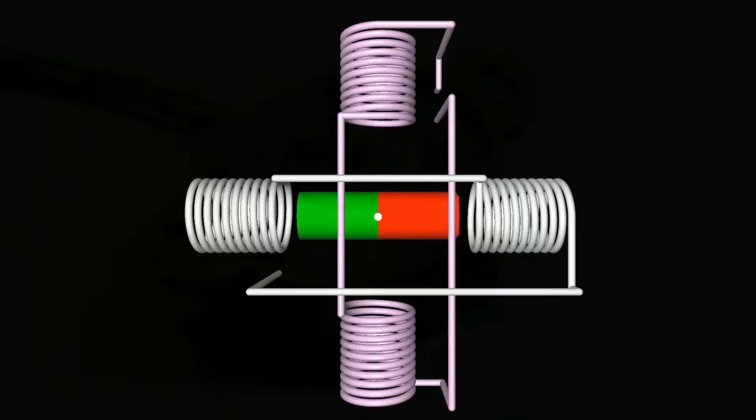The virtual motor shown here operates on the reaction between the bar-shaped permanent magnet forming the rotor and the field created by 4 electromagnets forming the stator. The 2 white marked coils arranged on the horizontal line are switched in series, thus they are organized in one group, called a phase.

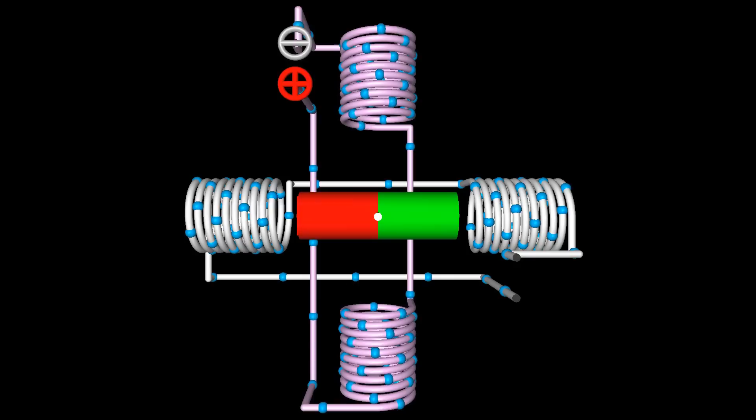Same is true for the 2 magenta colored coils arranged on the vertical line that form the second phase of the motor. The motor has 4 terminals in total, 2 for each phase.

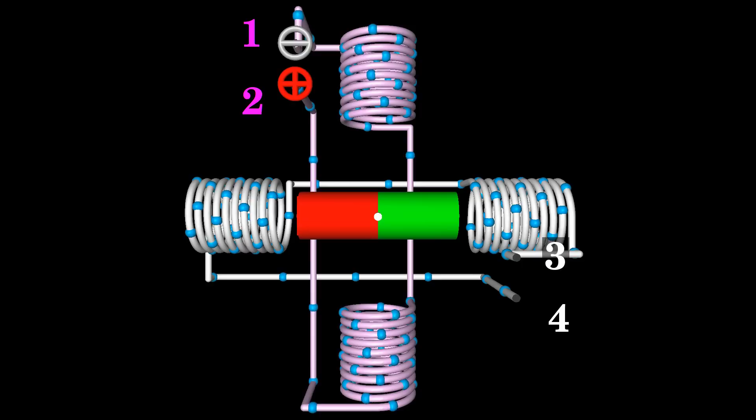As shown in a previous video about brushed DC motors, the electromagnetic field is caused by the movement of charged particles. As soon as the vertically aligned coils are connected to a DC voltage source, the blue painted electrons start flowing through the wire of the coils from the negative to the positive terminal.

Note that the upper end of the wire, which is terminal number 1 of the motor, is connected to the cathode of the voltage source, while the lower end, which is terminal number 2 of the motor, is connected to the anode. If you wrap your left hand around the wire of the solenoid with your fingers in the direction of electron movement, your thumb points towards the magnetic north pole created by the electromagnet. As you can see, the north pole points to the top of your screen.

Due to the field produced by the electromagnets, forces are acting on the horizontally aligned permanent magnet. The north pole of the permanent magnet is pulled to the top right, the south pole to the bottom left. The resulting torque points clockwise. Thus, as soon as released, the permanent magnet starts rotating clockwise.

After some overshooting caused by inertia, the bar magnet comes to rest with a rotational movement of 90 degrees compared to the initial state. The shaft of the motor has moved by 1 step. As long as the magenta colored electromagnets are connected to the voltage source, the permanent magnet will keep that stable position.

To make the rotor spin clockwise by another 90 degrees, the horizontally aligned electromagnets have to be energized with a polarity that creates a magnetic field whose north pole points to the right. As soon as the horizontally aligned coils are connected to the voltage source, the vertically aligned coils are disconnected from the electric power.

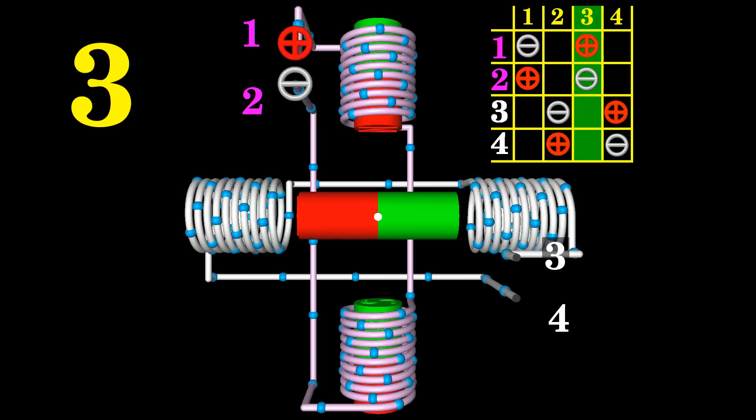From 3 to 2, and so on. Whenever the rotor has completed one step, the rotational direction of the next step depends on the polarity of the voltage applied to the stepper motor's terminals. A step is defined as the angular rotation produced by the output shaft each time the configuration of the voltage at the motor terminals is changed to a nearby column in the table.

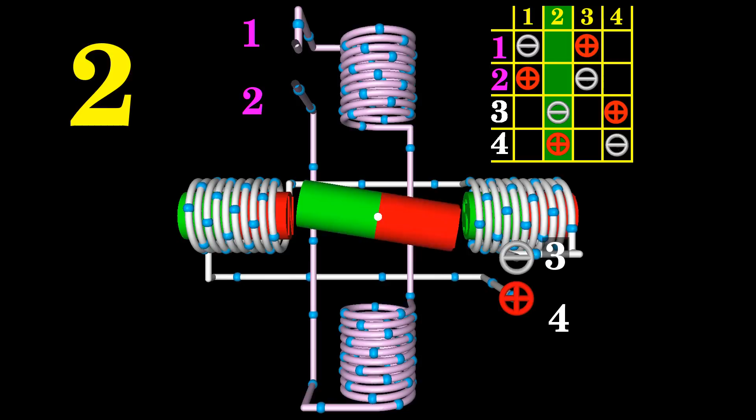The step angle represents the rotation of the output shaft caused by each step, measured in degrees. We get a step angle of 90 degrees for the motor shown here. The position of the motor shaft can be commanded to move and hold at any of those 4 steps without a feedback sensor. The rotational direction between 2 steps can be either clockwise or counterclockwise.

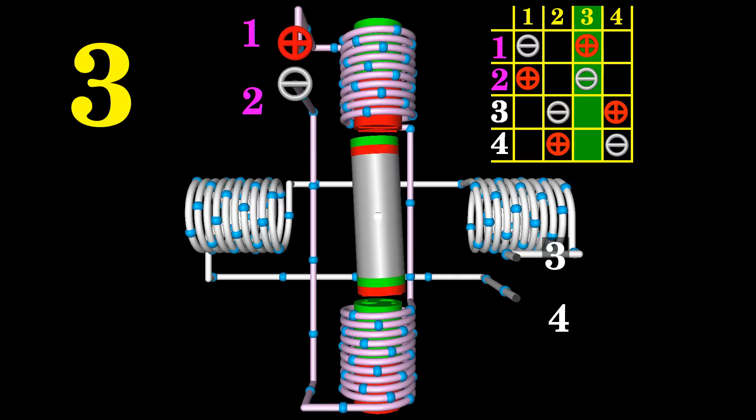The bar-shaped magnet can be replaced by a cylinder made of any solid material with 2 permanent magnets at its ends. The north pole of one magnet and the south pole of the other permanent magnet faces the stator. The motor shaft still rotates by 90 degrees with each step.

To get a higher angular resolution per step and thus a lower step angle, the rotor can be made of 6 permanent magnets. The magnets are arranged on the rotor in such a way that by turns their north respectively south pole points to the stator.

The terminals of the motor are enabled using the sequence listed in the table that was also used to command the previous motor. Note that the motor turns counterclockwise when going from left to right through the columns of the table. With each step, the motor shaft rotates just 30 degrees.

Consequently, after 4 steps, the motor shaft has moved 120 degrees, which is just 1/3 of the rotor movement done by the previous motor having 2 permanent magnets on its rotor. That's because the number of poles on the rotor of this stepper motor is 3 times larger. Go back to column 1 of the table to continue with the counterclockwise movement of the motor.

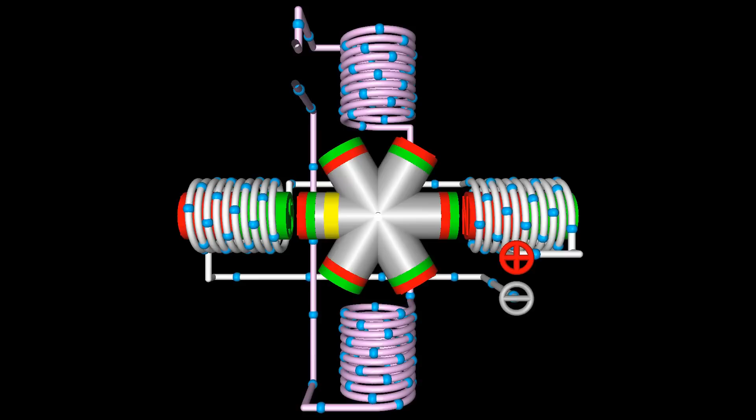A simple way of doubling the angular resolution of this stepper motor without changing the hardware is using half-stepping. Let's start with the horizontal electromagnets being energized. To make this motor spin clockwise by a full step, the vertical electromagnets have to be enabled with terminal number 1 of the motor connected to the anode, while at the same time the horizontal electromagnets are disabled.

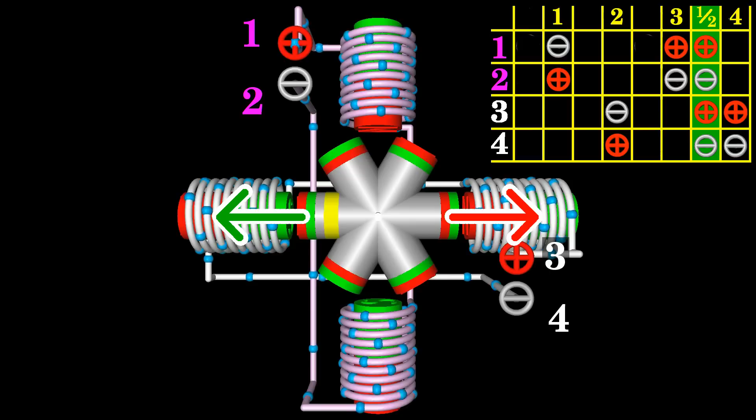In half-step mode, the horizontal electromagnets are not disabled, thus both phases are now on. The torque generated by the white-marked electromagnets is zero, since the forces acting on the nearby permanent magnets point along the horizontal axis. The torque on all other permanent magnets is cancelled out. The magenta-colored coils instead produce a torque pointing clockwise.

As soon as the rotor moves clockwise a couple degrees following the torque of the magenta electromagnets, the white electromagnets cause a torque on the rotor that points counterclockwise. After a rotation of 15 degrees, the torque produced by the white electromagnets counterbalances the torque of the magenta-colored electromagnets. The rotor stops at this stable position as long as both phases are on.

As soon as the horizontal electromagnets are disabled, the torque produced by the vertical electromagnets causes a rotation of another 15 degrees. The full step has been divided into two half steps by turning both phases on before turning off the first phase.

By inserting half steps between all full steps in the command sequence of the table, we get 8 steps for a rotational movement of 120 degrees. The angular resolution is doubled, the step angle halved. Using half-step mode, this motor divides a full rotation into 24 equal steps.

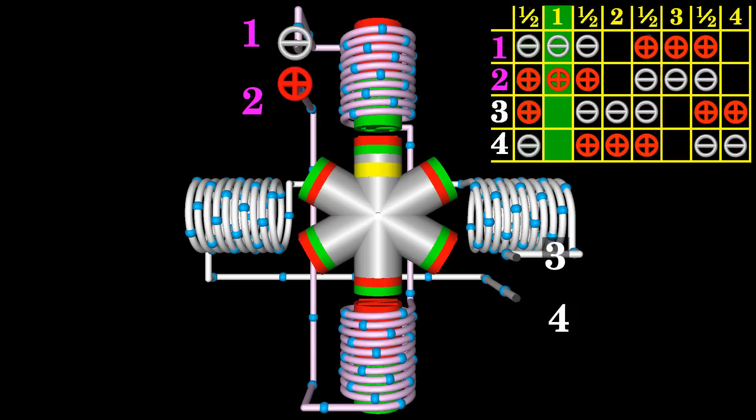Same as before, the rotational direction of the motor shaft changes when going from left to right through the columns of the table. Now the rotor spins counterclockwise. In half-step mode, the drive alternates between two phases on and a single phase on.

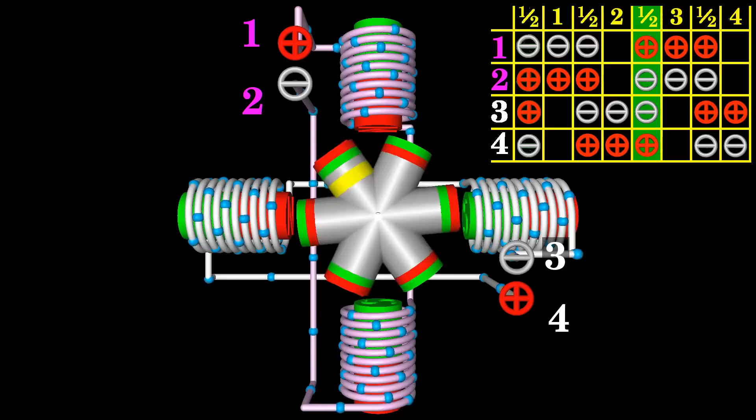When deleting the columns with just one phase on in the table, this stepper motor still rotates clockwise when going from right to left through the command sequence. This operating mode of a stepper motor is called two-phase on full step excitation. In that mode, both phases are always on, and from one step to another, the polarity of one of the phases is changed. The rotational movement is 30 degrees per step, which is equal to the normal full step mode.

The advantage of keeping both phases enabled is the higher torque produced by all 4 electromagnets during motor operation. The disadvantage is the doubled current flowing through the motor compared to the single phase full step mode.

Let's change the winding arrangements of the electromagnetic coils in the two-phase stepper motor. The coil shown here has one winding with a center tap that is connected to the positive terminal of the supply voltage. Whenever the right end of the coil is connected to the negative terminal, a current flows through the right half of the electromagnet. With your left hand you can determine that the magnetic north pole points to the right end of the coil.

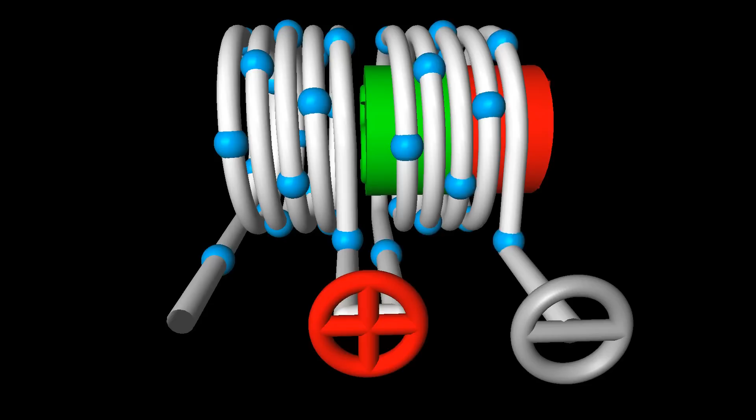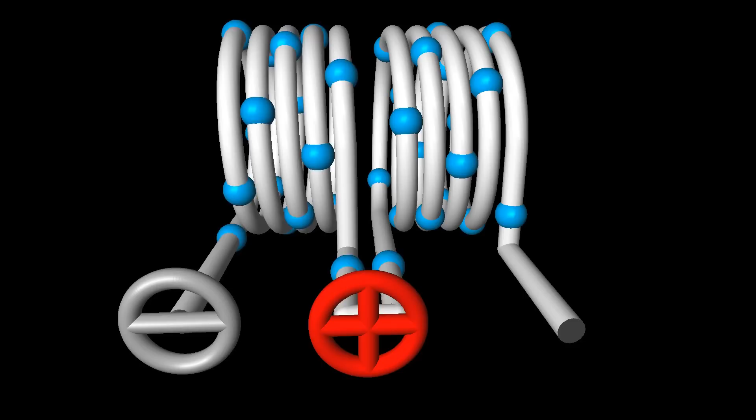If the left end of the wire is connected to the negative terminal, the current only flows through the left half of the coil. At the front side of the coil, the electrons move from top to bottom through the windings, thus the thumb of your left hand will point to the left end of the coil, which is the place of the magnetic north pole. With the center tap, the magnetic pole of the electromagnet can be reversed without swapping the polarity at a pair of terminals.

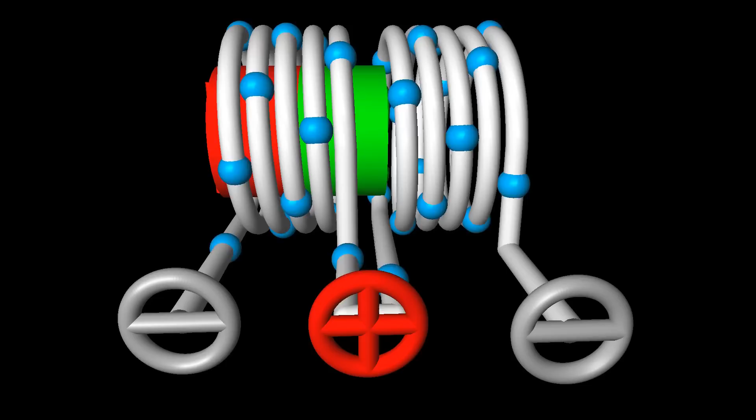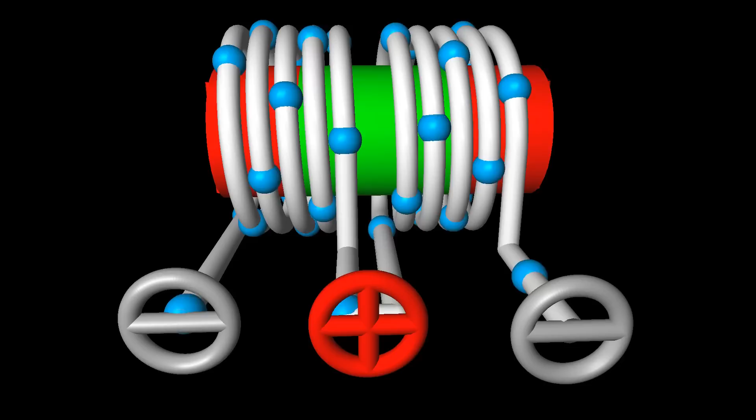Enabling both halves of the coil simultaneously makes no sense. The magnetic south poles are facing each other. The magnetic field is nearly cancelled out, since the electrons run in opposite directions at the front side of the coil.

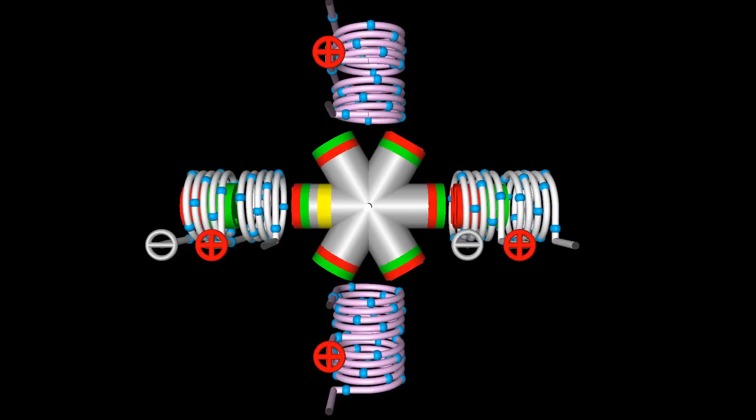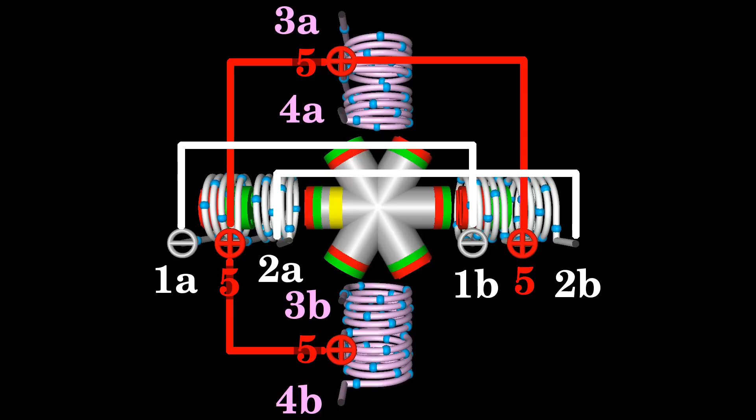In the motor shown here, each winding of the electromagnets has a center tap. All center taps are joined and connected to the positive terminal of the supply voltage. Once more, the white marked electromagnets are grouped to a phase. To achieve this, the wire end at terminal 1A is joined to 1B, as well as 2A to 2B. Same is true for the magenta colored electromagnets. Terminals 3A and 3B, as well as 4A and 4B are also joined. In total, we get 5 terminals coming out of the motor.

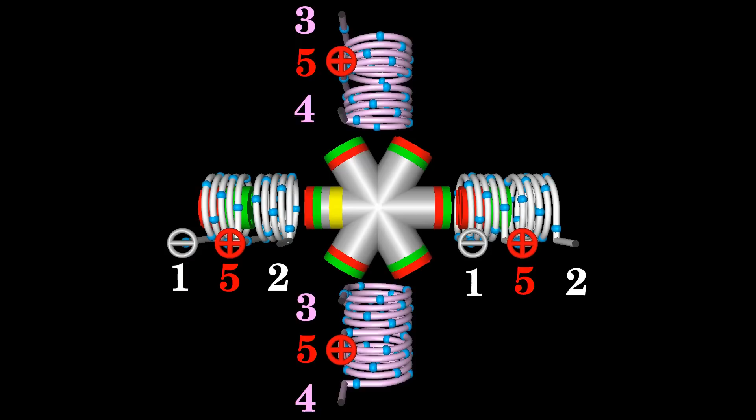Let's command that motor to process clockwise rotation. To process step number 1, the horizontally arranged electromagnets have to be disabled. The magnetic north of the vertical electromagnets must point to the bottom of the screen, thus terminal 4 has to be connected to the cathode of the supply voltage.

Disabling the vertical electromagnet and connecting terminal 2 of the motor to the cathode is needed to process step number 2. To swap the magnetic polarity of the vertical electromagnet compared to step number 1, terminal 3 has to be connected to the cathode of the supply voltage. Terminal 2 is disconnected from the power supply to reach step number 3. Finally, terminal 1 is connected to the cathode and terminal 3 is disconnected from the power source to process step number 4. The enabling sequence is 4, 2, 3, 1, with terminal 5, the center taps, being always connected to the anode of the voltage source.

One end of each winding is connected to the cathode once in every 4 steps of the motor shaft. The rotational movement is commanded without swapping the polarity at one of the terminals, which is why this motor is called unipolar stepper motor. This motor can also be commanded in half-step mode. Even in this mode, no more than 50% of the windings are energized at the same time during operation.

Another type of unipolar stepper motors is the variable reluctance stepper motor. The motor shown here is made of 3 pairs of electromagnets, thus 6 electromagnets in total are arranged on the stator with an angle of 60 degrees between 2 coils. The left ends of the 3 phases are connected to the anode of the voltage source. The right ends of the coil wires are connected temporarily to the cathode to make the motor turn. The rotor is made of a soft iron bar.

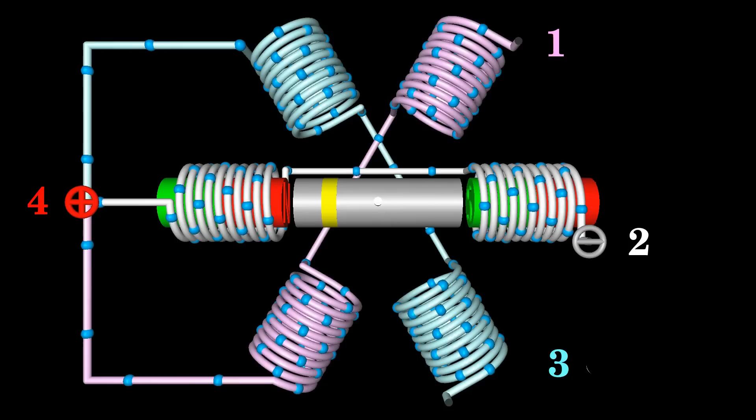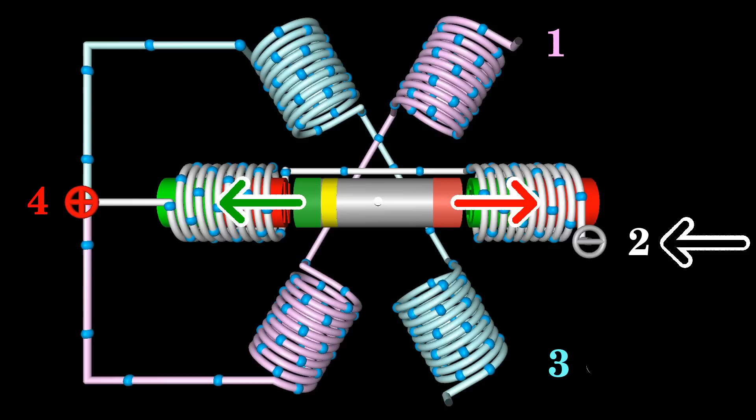Let's have a closer look at the working principle. At the initial state, terminal 2 of the motor is connected to the negative terminal of the voltage source. The ends of the iron bar are attracted by the enabled electromagnets. Since the iron cylinder is aligned horizontally, the forces are pointing along the center line of the rotor, thus no torque is generated.

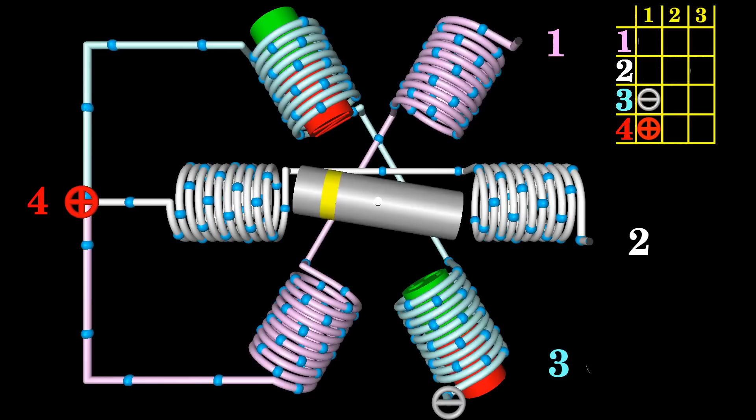As soon as phase 2 is disabled and phase 3 gets energized, the resulting torque points clockwise. The rotor follows that torque until the iron bar is arranged in line to the center axis of the two enabled light blue electromagnets. Phase number 1 must be enabled and phase number 3 disabled to make the rotor spin clockwise by another 60 degrees.

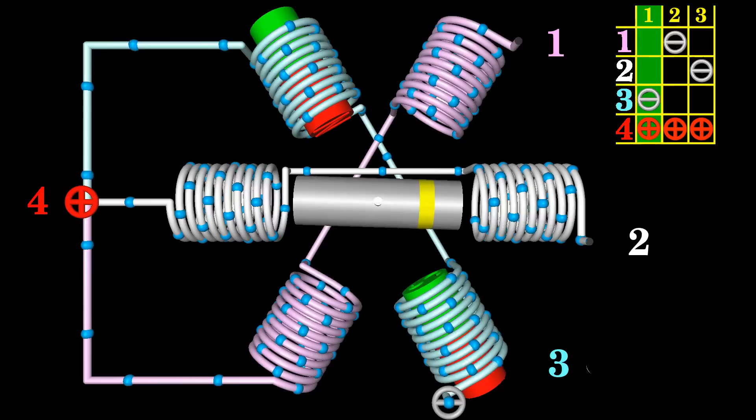When disabling phase number 1 and enabling phase number 2 again, the rotor has turned by 180 degrees compared to the initial state. Note that the polarity of the horizontal electromagnets is identical to that of the initial state. The phase switching sequence for the 180 degree rotation was 3, 1, 2. When running that sequence for a second time, the motor spins another 180 degrees.

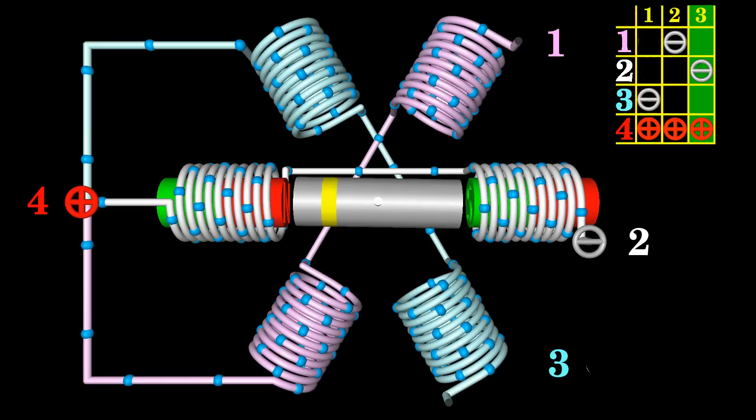6 steps are needed for a full turn of the rotor, with terminal 4 of the motor being always connected to the anode of the voltage source. The direction of rotation changes when going through that sequence in reverse order. The rotor spins counterclockwise if the stator coils are enabled in a counterclockwise sequence.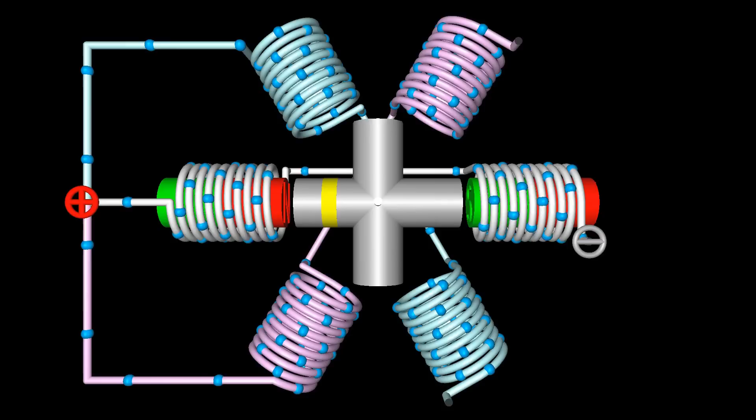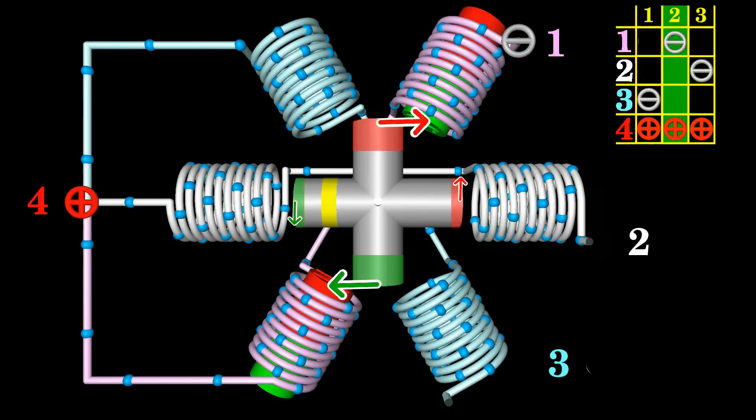Let's modify the stepper motor slightly. Now, 2 iron cylinders with an angle of 90 degrees between both bars form the rotor. Same as in the last animation sequence, the phases at the stator are activated counterclockwise. Phase 2 is enabled in the initial state, phase 1 in order to process the first step,

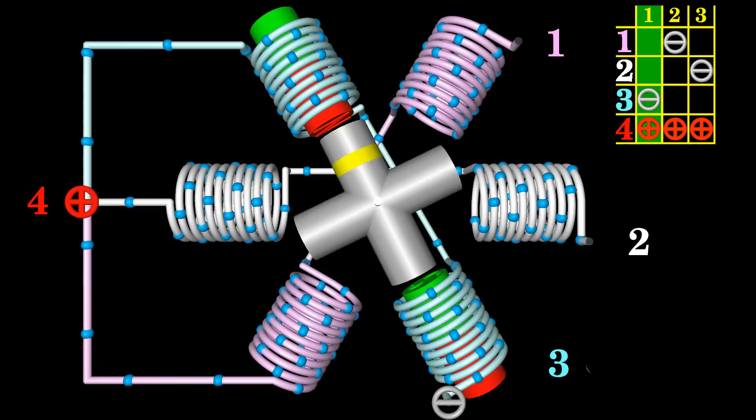phase 3 during the second step, and finally phase 2 is energized again with the same polarity as in the initial state to process the third step. As you can see, the rotor spins clockwise even while the electromagnets are enabled counterclockwise. Besides the command sequence, the rotational direction of a stepper motor depends on the number of teeth at the rotor.

In full step mode, 1 out of 3 phases is on during operation of the motor. 33% of the electromagnets move the rotor. Remember that 50% of the electromagnets were used in the bipolar stepper motor in full step mode. The rotor is said to have 4 poles, even if soft iron is essentially not magnetized. However, as soon as a phase is energized, magnetic poles are formed at the ends of the rotor.

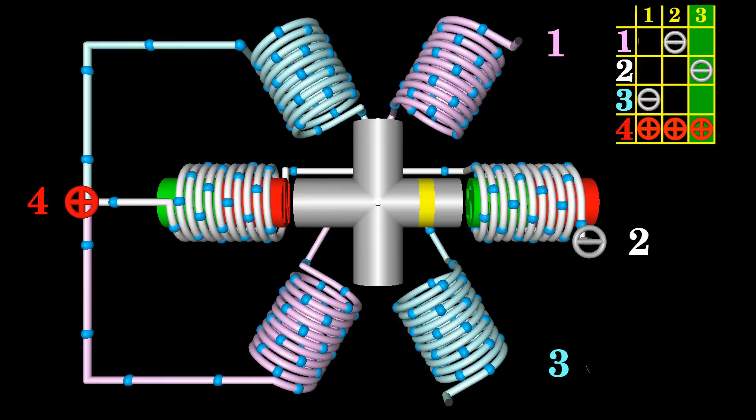You can also operate that motor in half-step mode. In the initial state, phase 2 is energized. Phase 1 is also energized while number 2 is still powered for the first half step in clockwise rotation. Turning off phase 2 moves the rotor to the position of the first full step.

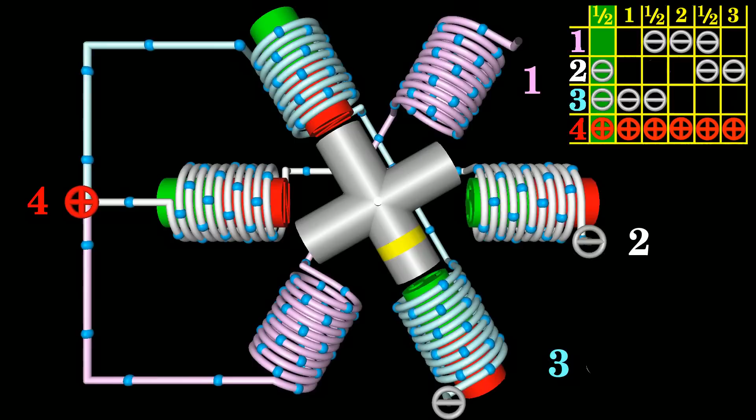Energizing phase 3 while phase 1 is still powered is the third half step. Turning off phase 1, the fourth half step, bringing the rotor to the position of the second full step. Following that scheme, the rotor spins 90 degrees with 6 half steps. The shaft rotates 15 degrees per half step.

In half-step mode, the command sequence alternates between having 2 electromagnets and just 1 electromagnet turned on. No more than 66% of the electromagnets are enabled simultaneously. Remember that 100% of the electromagnets were used in a half-step of a bipolar motor.

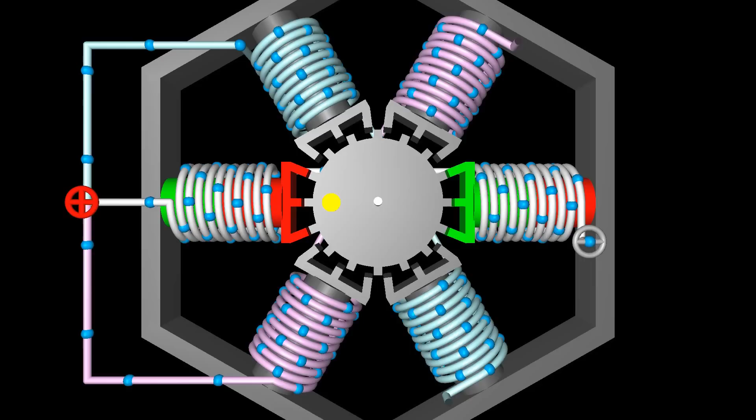This is also a unipolar stepper motor with 3 pairs of electromagnets forming the stator. The coils are wrapped around a soft iron core. The core ends pointing to the rotor have 3 teeth each, thus we get 18 teeth in total. The rotor is a geared wheel made of soft iron with 16 teeth. In the initial state, the horizontally mounted electromagnets are energized.

The teeth of the rotor are aligned with the stator teeth of the white marked coils belonging to phase number 2, while there is an offset between stator and rotor teeth for all other electromagnets. When energizing phase 1 and de-energizing phase 2, the rotor teeth will move to align with the stator teeth of the magenta colored electromagnets. This results in a clockwise movement of the rotor by 7.5 degrees, which is 1/3 of a tooth pitch.

The electromagnets always attract the rotor teeth next to the stator teeth with highest force. To make the rotor spin clockwise by another 7.5 degrees, phase number 3 has to be enabled while phase number 1 gets disabled. Now, the rotor teeth are aligned with the stator teeth of the light blue electromagnets. When enabling phase 2 and disabling phase 3, the rotor will rotate to get realigned with the teeth of the white marked stator coils. The situation is similar to the initial state, besides the fact that the rotor has moved clockwise by 22.5 degrees.

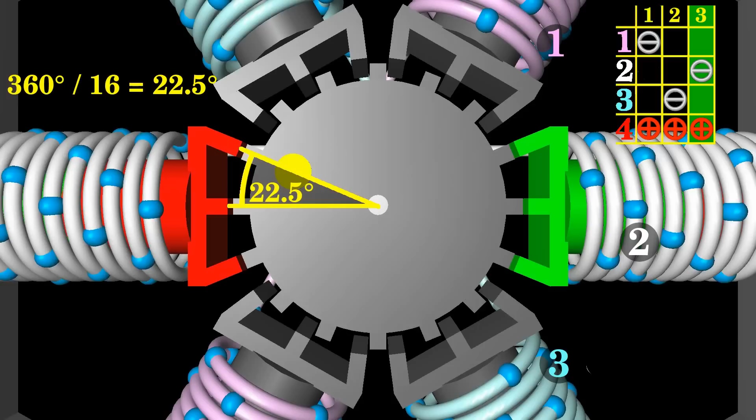When switching the phases in reverse order, the motor spins counterclockwise. The electromagnets are enabled clockwise to make the rotor spin counterclockwise. The rotor moves to minimize the air gaps between the iron of the stator and the rotor. Magnetic reluctance or magnetic resistance is analogous to ohmic resistance in an electric circuit. The magnetic resistance of soft iron is clearly lower than that of air.

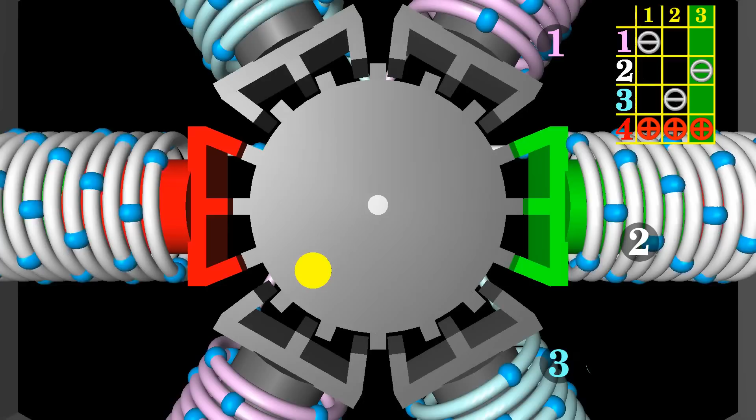When a stator pole is energized, the rotor torque is in the direction that will reduce the size of the air gap in order to reduce the reluctance of the total magnetic circuit. That's why the nearest rotor poles are pulled from the unaligned position into alignment with the stator field, which is a position of less reluctance. The reluctance will vary during motor operation. That's why this type of motor is called variable reluctance stepper motor.

You can operate that motor in half-step mode too. Starting with phase number 2 being enabled, the first half-step for a clockwise rotation is commanded by enabling phase number 1. Now, the rotor moves clockwise to reduce the air gaps between rotor teeth and stator teeth of the magenta colored electromagnets. In doing so, the air gaps between the rotor and the white marked electromagnets of phase number 2 are enlarged. The state of minimal reluctance for the magnetic circuits formed by both pairs of enabled electromagnets is reached after a clockwise rotation of 3.75 degrees.

Disabling phase 2 makes the rotor spin by another half step, so that the rotor teeth are aligned with the stator teeth of phase number 1. Same as with the stepper motors treated before, the command sequence alternates between having two electromagnets and just one electromagnet turned on. After 6 half steps, the rotor teeth line up with the stator teeth of the white colored electromagnets again, but the rotor has moved during the command sequence by 1 tooth pitch, which is 22.5 degrees.

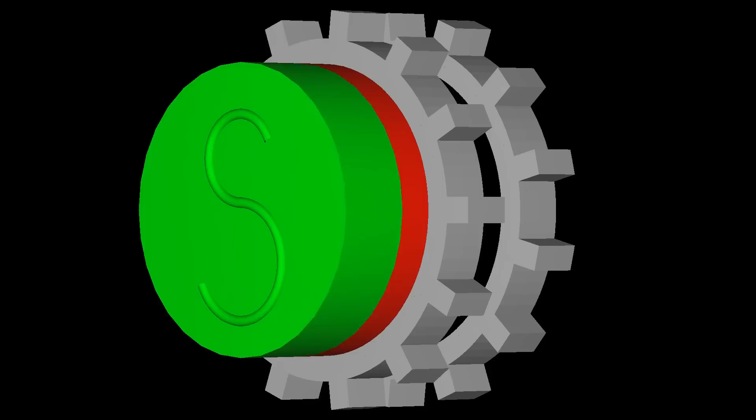Let's modify the geared rotor of the variable reluctance motor. This one has 13 teeth. Let's add a second gear with the same number of teeth. Now the additional gear is turned a couple degrees, so that there is an offset of half a tooth pitch with the first gear. Let's remove the iron core and replace it by a permanent magnet with the gears attached to the poles of the bar-shaped magnet.

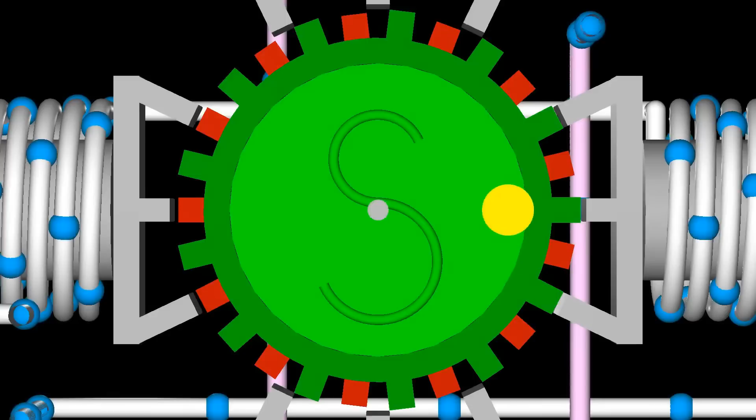The gear teeth connected to the north pole of the permanent magnet form north poles, while the other ones form the south poles of the rotor. Let's insert that rotor into a bipolar stepper motor with a toothed stator composed of 2 pairs of electromagnets. The command sequence is identical to that of the bipolar stepper motor treated at the beginning of this video.

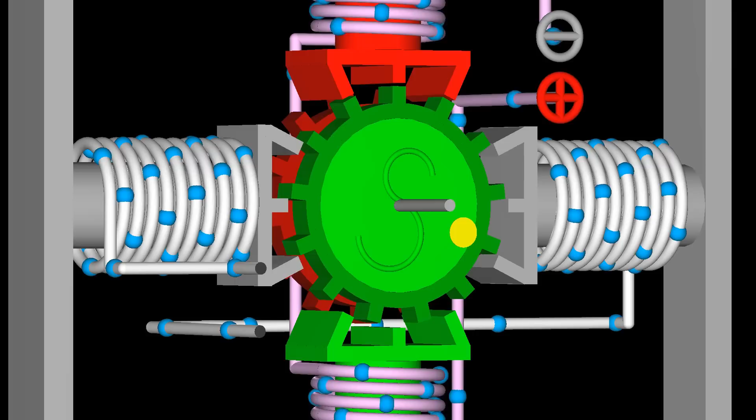Whenever a phase is enabled, the teeth representing a south pole at the rotor line up with the teeth of an electromagnet forming a magnetic north pole at the stator. In contrast, the gear at the back of this animation is connected to the north pole of the permanent magnet, and its teeth line up with that electromagnet forming a south pole at the stator. The front view illustrates the alignment of rotor and stator poles clearly.

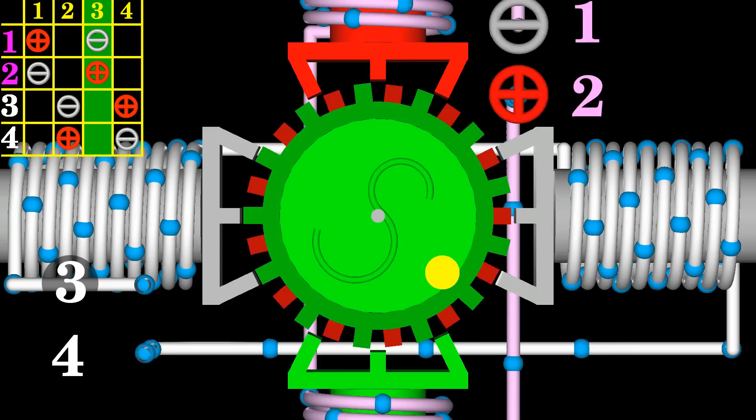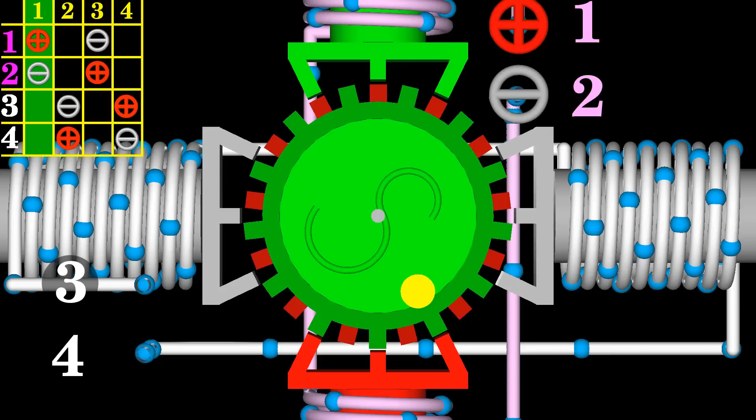In total, the rotor has 26 poles. With each full step, the rotor moves by half the angle between two poles, which is less than 7 degrees. 52 steps are needed for a full turn of the motor shaft. With a half step, the motor spins less than 3.5 degrees, thus 104 half steps are needed for a full turn.

This type of motor is called hybrid stepper motor. The name is derived from the fact that the rotor is composed of two materials: two gears made of soft iron as used in variable reluctance motors, as well as an axially magnetized round permanent magnet.

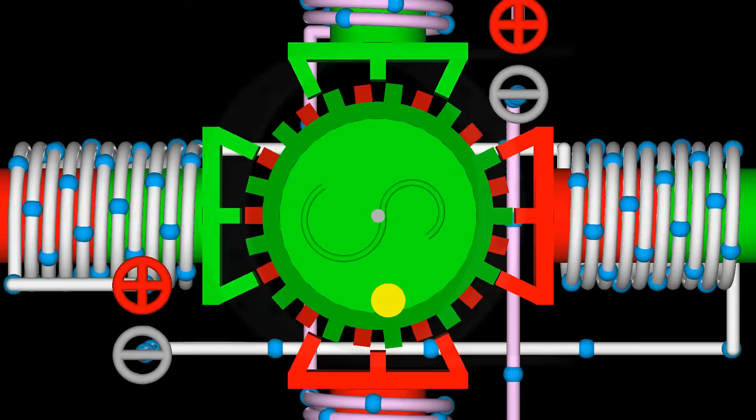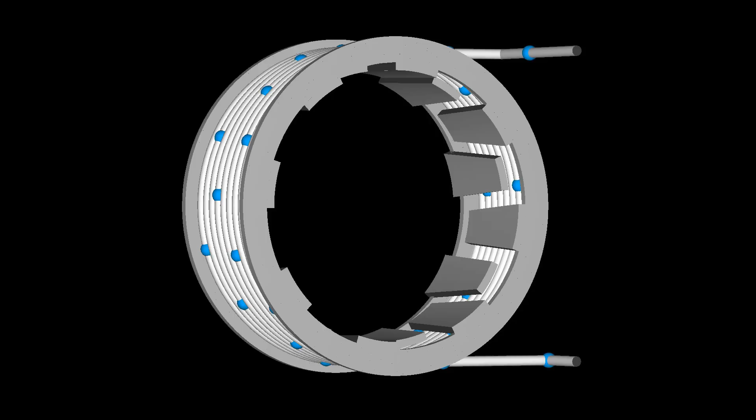The last stepper motor treated in this video is the can stack motor. A phase of that motor is based on a bobbin wound coil design. The bobbin has claw teeth brought to the center that form the poles of the stator. To increase efficiency of the motor, the bobbin is covered with a layer of soft iron so that the stator windings are embedded in a can. To give you a better view on the stator windings, the can is perforated in this animation.

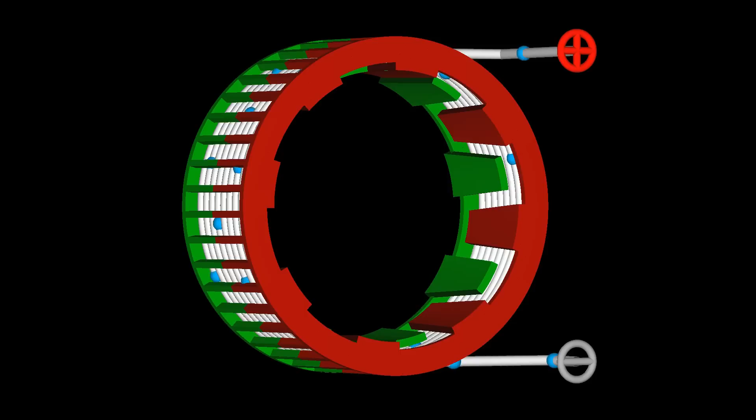If a current flows through the windings of the stator coil, magnetic poles are formed at the claws of the bobbin. With the polarity shown here, the magnetic north pole is created at the front of the coil, the magnetic south pole at the rear. The iron can shields the magnetic field created by the coil, which is why the field strength outside that cover is more or less zero. The field lines exit the iron container only on the edges of the claw teeth, thus you will detect magnetism nowhere but near those gaps.

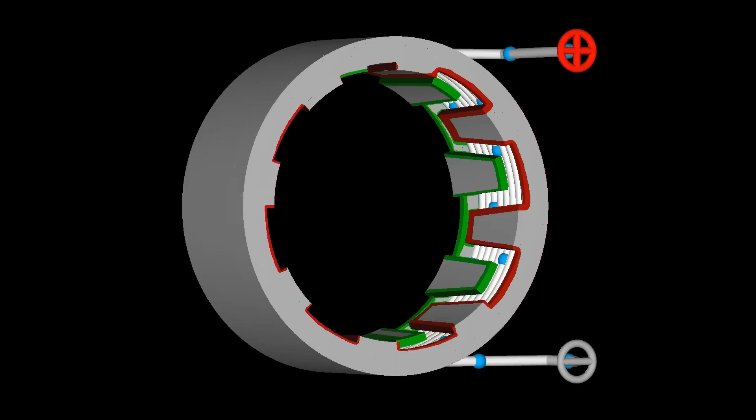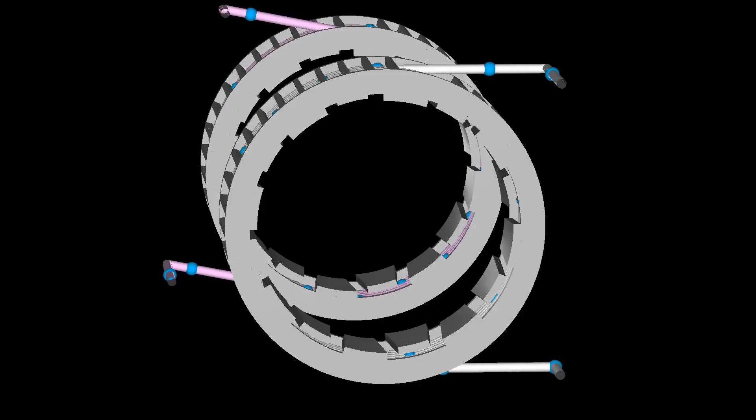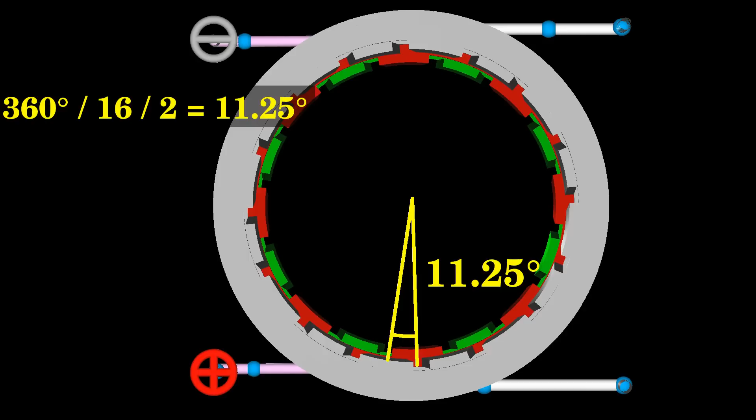Nonetheless, in this animation, the whole can is colored either green or red to illustrate the places of the magnetic poles more clearly. A second stator coil is needed to make the stepper motor work. Both cans are arranged in a stack, which is why this construction principle is called can stack motor. Both stator cans have the same number of poles, and the claws are arranged to be half a pole pitch apart. The motor shown here has 16 poles per stator can, thus the second bobbin is twisted by 11.25 degrees.

The rotor is made of a permanent magnet with the same number of poles as one of the stator cans, thus we get 16 poles in this animation. The can stack motor is a bipolar stepper motor, thus the polarity at the terminals is swapped during operation. The rotor moves with each step to get in line with the poles of the enabled stator can. The north poles of the rotor are aligned with the south poles of the stator. Whenever phase 1 is enabled, phase 2 is disabled.

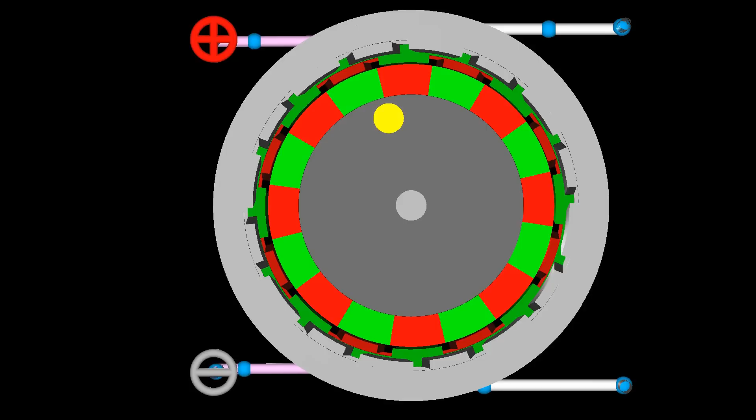Because there is an offset of 11.25 degrees between both cans, which is half a pole pitch, the shaft moves the same number of degrees with each full step. After 4 steps, the rotor has moved 45 degrees, thus 32 full steps are needed for a full turn. Of course, this type of motor can also be operated in half-step mode and two-phase on, full-step excitation mode. You already should know what those command sequences look like. If not, rewind this video to the section about bipolar stepper motors or have a look at the project page.